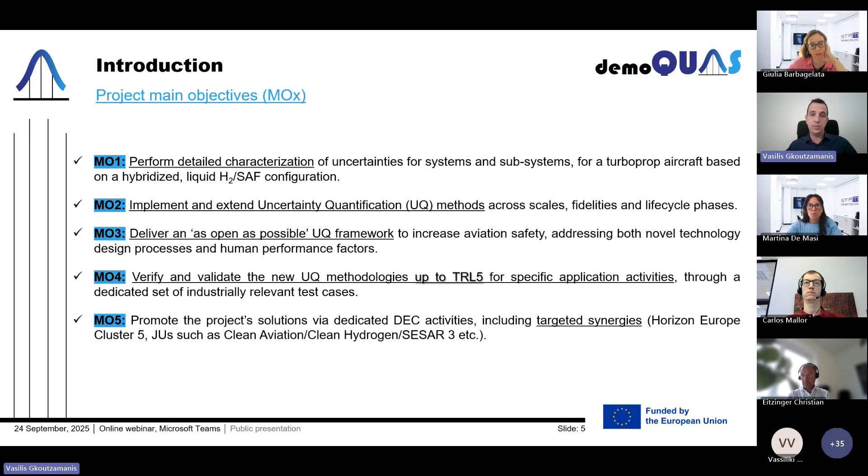Obviously, the fifth objective has to do with the synergies, and this webinar today is part of our main objective 5. Maybe these objectives do not say a lot so far to you, so I will try to delve a bit deeper into what we mean by each objective.

First of all, I would like to highlight how the project is linked with the main title of the webinar. This is, on one hand, the more sustainable aviation goals, so we are working on disruptive aviation technologies. The main scope of the project comes with hybridization and electrification, as well as the use of alternative fuels. This is why you see these words highlighted.

On the other hand, some of the test cases work on composite structures, and these comprise engine components as well as fuel tanks. So essentially, this creates the challenge: new components, new technologies, which bring forward design uncertainties, which put safety at risk when it's a new technology, and we need to delve deeper and provide evidence-based quantification of the safety factors and safety margins.

On the other hand, whenever we talk about new propulsion systems, for example distributed propulsion, when we have multiple propulsions on board, the components of the system can increase. This may raise issues with respect to failure cases on the systems level, and we need to be able to address those. So in a way, the safety factors which have been applied through all these years in aviation rely on old assumptions and may need further work to cover all new risks.

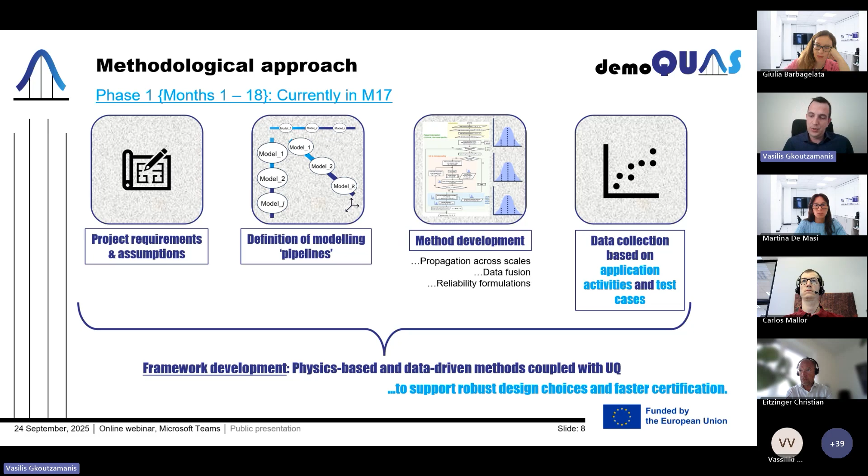And what we are currently focusing on is the development of the test cases. So manufacturing activities are also ongoing, and the main goal is to collect the different data coming from the different processes. I understand this slide may be a bit too dense to follow, but we make a classification between application activities and test cases. Application activities include all modeling approaches, whereas test cases include those particular cases where we will have actual testing data, manufacturing data, and even data from operations.

So we start from the system of systems. For example, this could be the aircraft system, moving on to systems from a technology's perspective, and this could be our engine, our propulsion system, and also the subsystems, which are the components from storage to burn: a tank where the fuel is stored, including the conditioning of the fuel, for example the heat exchangers, as well as the combustion of the fuel in the engine.

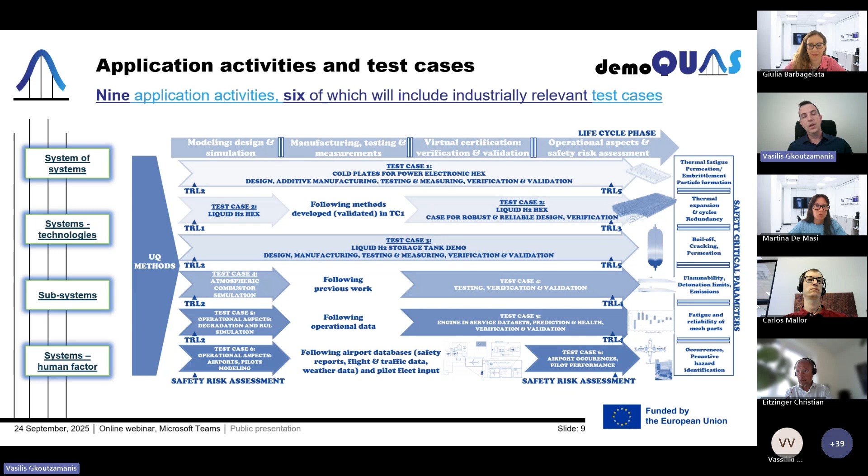But there is another perspective in this project. As you can see, bottom left side, the system's human factor. We assume that the human factor acts as a system, and we try to quantify the interdependencies that may have an impact on the pilot's performance during operations, and we want to see how we can couple that with an uncertainty quantification method.

Some examples of the test cases. These are not all the test cases, but I have chosen some indicatively to provide more words on each one. You can see here how our work is linked with the composite structure development. We want to couple the uncertainty quantification modeling with the CAM processes, computer-aided manufacturing processes, and the eventual manufacturing processes, such as rapid tow shearing from iCOMAT, or processes like filament winding from our partner in Greece, B&T Composites, and also be able to create a pipeline during manufacturing and measuring.

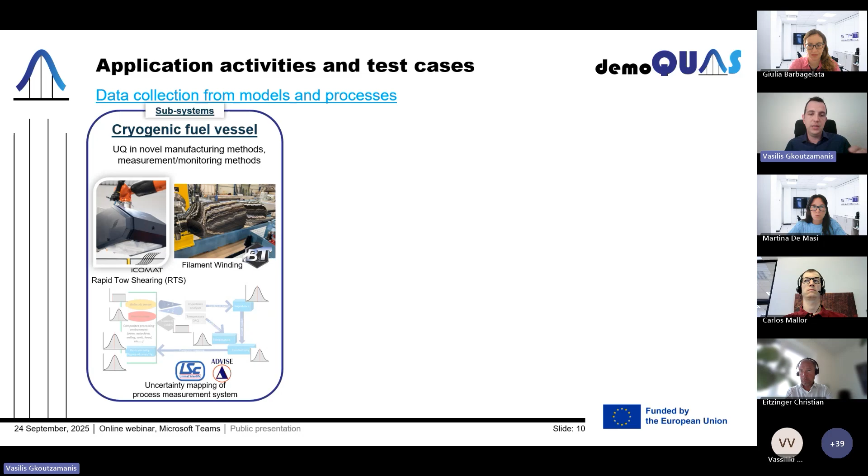A second subsystem comes with the cold plates, which are used for the power electronics. The perspective of this use case is to perform topological optimization, provide topologically optimized shapes, which proceed further to the manufacturing processes and testing activities. So this activity also contributes to the verification validation assessment, and this is directly involved with certification processes and digital certification principles that EASA also has. What you're seeing here is a cold plate example and a use case performed by Rolls-Royce on the cold plate for the heat exchanger of power electronics.

Moving on to the right-hand side of the slide, at systems level and technologies, we are working on engine performance quantification. The risk here, or rather the focus, is to be clear on how an engine degrades during its operation and various cycles of operation. We want to further reduce any uncertainties that characterize the remaining useful life of this component.

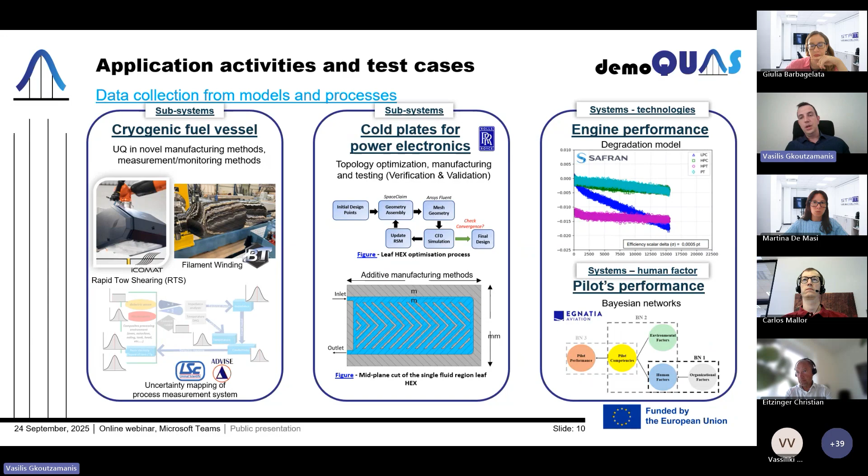Again at the systems level, but from a human factor perspective, we are developing a machine learning based model using Bayesian networks. We want to quantify the pilot's performance, seeing how different dependencies spanning from environmental factors, pilot competencies, human factors, and organizational factors of training may overall lead to the pilot's performance, and how these methods can improve this part.

I see that my time is almost there, so I will be very brief. Failure modes relate to the system's redundancy. We want to ensure the propulsion system operates even if a component malfunctions or stops operating, so throughout the whole mission we have redundancy in each of the systems and subsystems.

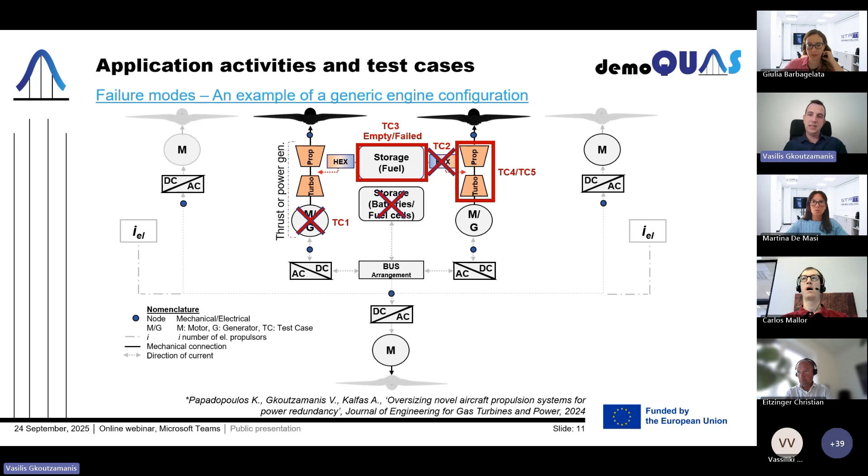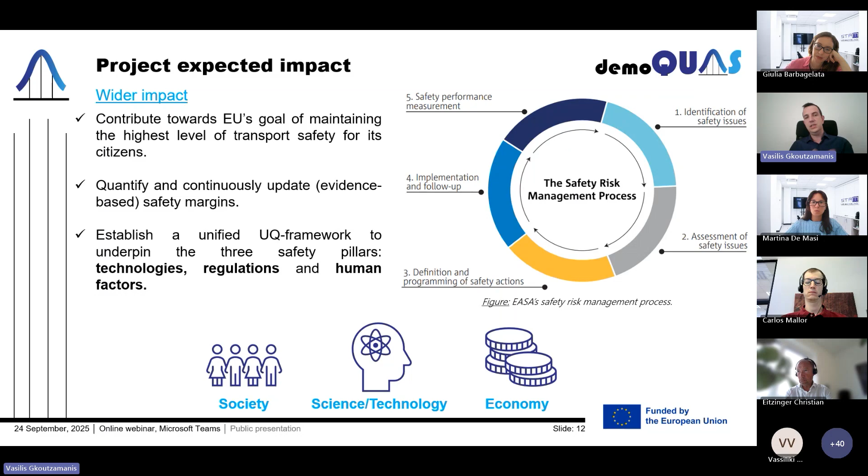As a closure, we expect that we will contribute towards the EU goal of maintaining the highest level of transport safety for EU citizens. We want to quantify and continuously update the safety margins and provide evidence-based characteristics. At the very end, we want to establish a unified uncertainty quantification framework for the three safety pillars: technologies, human factors, and regulations.

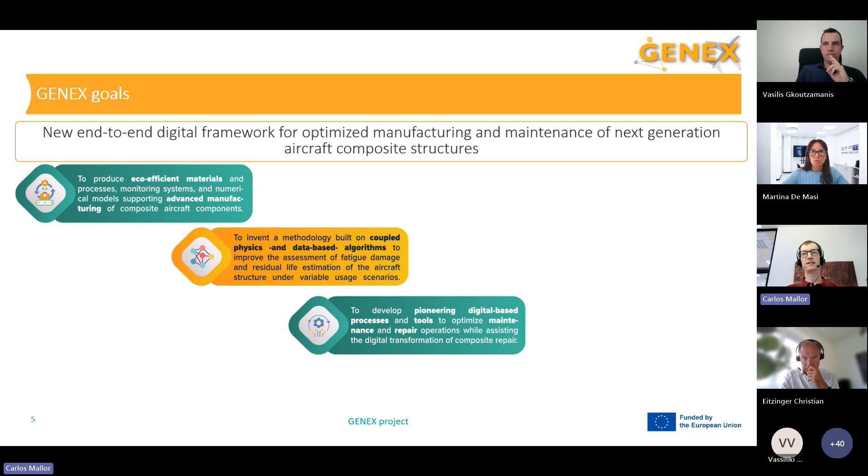The third specific objective and also pillar of our project is to introduce, in this nowadays manual repair process of this kind of parts, some digital methods and digital assistance in order to help the operator make the repair more accurately. These are the basic three pillars, and we have an additional one which is kind of transversal because it tries to interconnect everything together.

So we wanted to create a multidisciplinary platform, a digital twin platform, able to gather information throughout the whole life cycle of this product, covering manufacturing, usage, and also repair, so that we are able to create an ID of the part in order to have a log of the whole life cycle. And just as we saw in our last presentation, this is why we are here today.

So the GENEX project is here because we are advancing in digitalization, providing augmented reality tools for repair. We are talking about composite parts and composite technologies. We want to make them safer because we develop technologies able to control the health of the component. We are also talking about sustainability, using eco-friendly materials and more eco-friendly manufacturing processes, for aviation, using aircraft composite demo cases. So this is fairly clear why we are here together with DEMOQUAS and TOSCA, GENEX sharing our developments.

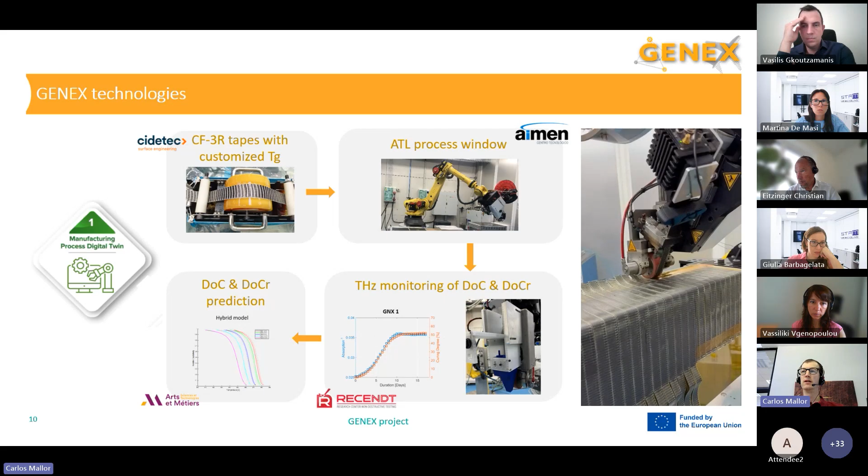In our project, nowadays we are actually manufacturing these demos, so we are in the demonstration stage of the project, in the very last one, and we will test these parts soon, according to the next developments, which are here.

So this is the second one: product usage, how our product, in this case the demo case spar, behaves over time when under real usage. At the very core of these technologies lie ultrasonic guided wave simulations, as you can see in this animation, and basically what we are doing is monitoring our structure.

We control a baseline where the component is pristine, and we are able to detect, thanks to piezoelectric sensors optimally arranged in this part, if some event happened—if we have an impact, or a delamination, or whatever. We developed this technology with tons of simulations and also a lot of actual mechanical tests, all monitored using these sensors that were embedded in our parts during the previous manufacturing process that I presented to you.

And then we have an arrangement of sensors, so we are able to receive the information from these sensors, and we collect it in a wireless sensor node, which is developed by CSEM.

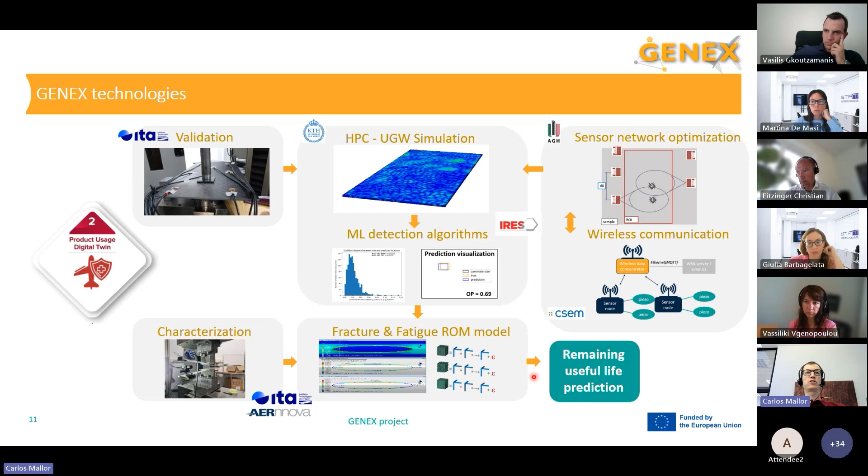Okay, so now the third one. Here we develop many tools regarding digitalization of maintenance, repair, and overhaul of these kinds of structures. The first one has to do with virtually assisting the scarfing process. The scarfing process, very briefly, is basically to remove some of these stacking layers of the composite where we have to perform a repair. We may have a delamination or an impact, and we need to remove this. This is done very manually nowadays, but thanks to the developments of DLR colleagues, we are able to use augmented reality to help the operator perform this operation more accurately.

Then the second one, we also thought it was interesting to work on cleaning. We may have dust or oil or other things that may interfere in the patch repair. For that, we developed a LIBS system, which is laser-based, where we are able to detect and also remove this dust or whatever we may have there.

Then this third part, which we developed in collaboration with GMI colleagues: we are using a system they have to apply a heat flux to blankets that are put on top of the patch repair in order to cure it once it is scarfed and ready for repair. We control temperature using a limited amount of thermocouples, but together we developed a reduced order model to estimate the full field of the heat transfer. So we are providing tools that help us control the process in a better way.

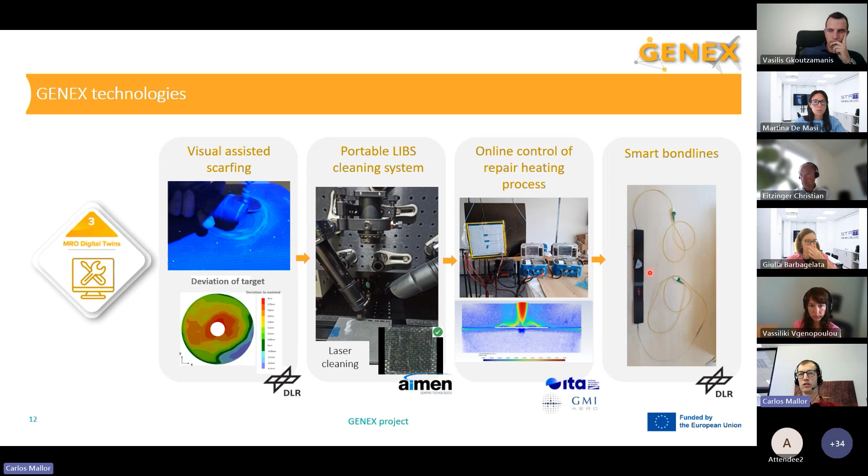And lastly, within this block we also develop some crack-stopping technologies that we can put at the interface between the patch and the actual component, to stop those cracks in the event they may occur again. So basically, those are the technologies in this third pillar.

And lastly, this is the transversal one: the platform that we are still finishing nowadays. This is the digital platform that needs to communicate with all of the other pillars. It takes information from the actual sensors during manufacturing, and it's also in charge of running the algorithms I described regarding structural health monitoring and fracture prediction, and also takes care of the digital twin of the repair that I just presented. So this is kind of the end goal we aimed for at the very beginning of the project.

Okay, so just to quickly recap, I want to talk about how GENEX technologies are transferred to industry. We had some industrial partners: Aernnova, manufacturers, Ziegler, and GMI experts in repair, and as you can see they are benefiting from these advancements. We also got some really important people on the advisory board from Lufthansa Technical Training in Germany and also from Tarmac Aerosave here in Spain. They really helped us throughout our project to stay focused, close to industry, and aligned to the real needs, so we consider this a really important part.

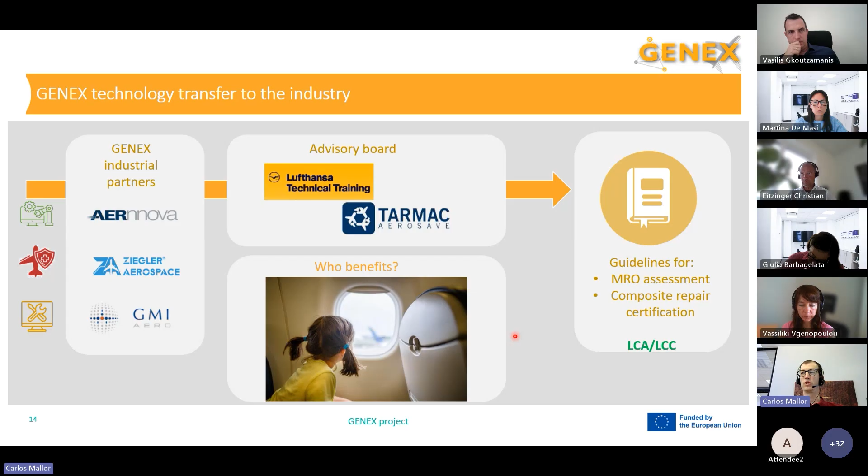And just to conclude, I want to highlight again that we were developing this whole project always thinking about society in general as the main beneficiary, as we are more concerned these days about eco-efficient materials and processes. So I just wanted to close with this point.

Okay, so I think this is all from my side. Sorry for the interruption, I had some connection problems. These are my details, and this is our webpage, so please feel free to contact me if you want to talk about some of the technologies involved here, or if you have any other questions.

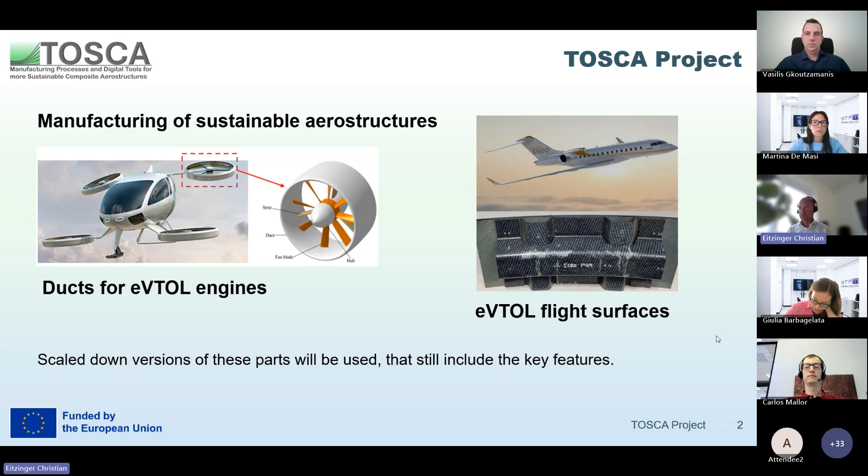The background for the project is about parts that may be relevant in future aerospace, especially electrical vertical takeoff and landing applications. The parts we are looking at will be scaled down versions of these future parts, but they will have the main features expected in these future aerostructures. As a particular focus of the project, we are dealing with sustainability, which gives the connection to the webinar we are now having.

In our project, sustainability is not only a materials topic. Clearly materials are important, but if you substantially change the materials you are using, this will have significant impact on the processes, not only during manufacturing but along the whole life cycle. In the project, we're also looking at how digitalization can improve the processes and optimize the reuse of parts at the end of their life.

In order to do that, we are dealing with three different topics. The first is on the material side. Epoxy vitrimer resins have already been developed. They combine the advantages of currently used thermoset resins in terms of mechanical strength and durability, and on the other hand, the advantages of thermoplastic materials that are easier to recycle. We want to make use of both of these advantages and develop processes using these vitrimer resins so that they are really suitable for the manufacturing of future aerostructures.

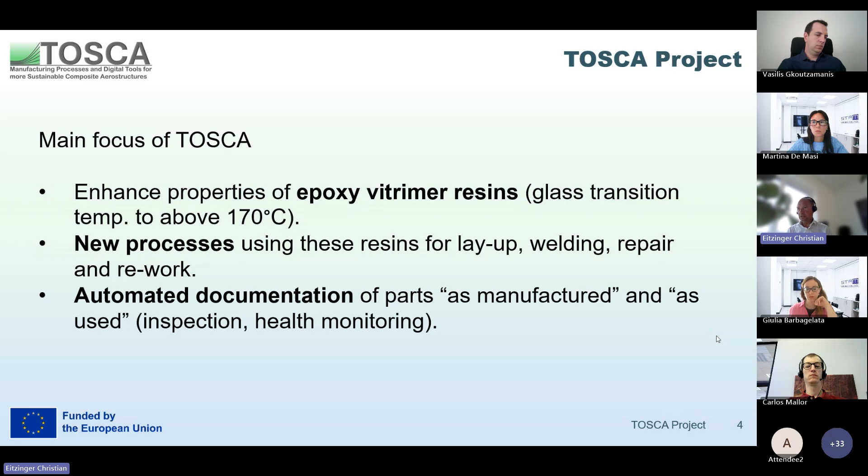The processes we are looking at include the main manufacturing processes such as layup and welding, but also processes that might be relevant in the future during the life cycle of the parts, especially repair processes. Along this whole life cycle, the automated documentation of the parts as they are manufactured and used is the main part for digitalization that we are looking at.

Just a brief overview of the production process. The standard manufacturing process ends basically here where the parts are finished. We are following a somewhat standard approach, starting with layup, where you create the stack of material. We are using pre-preg material in our project. We will look at ways to integrate structural health monitoring during the layup. There will be some curing stage, and an additional welding stage to join the cured parts.

This is different from current thermoset resins because they are obviously not suitable for welding, but the new vitrimer resins enable us to do that. Once the part enters into its life, we perform structural health monitoring to acquire information about what's happening inside the part, and we are also looking into repair processes - on one hand making these processes suitable for the new type of material, but also how we can acquire digital information about the repair processes, which is a bit tricky because very often these processes are manual.

And the backbone for all of this is a digital model of the part. We may call it a digital twin that is collecting information about what has happened to the part during its lifetime, and we can use this model at some stages of the life cycle of the part.

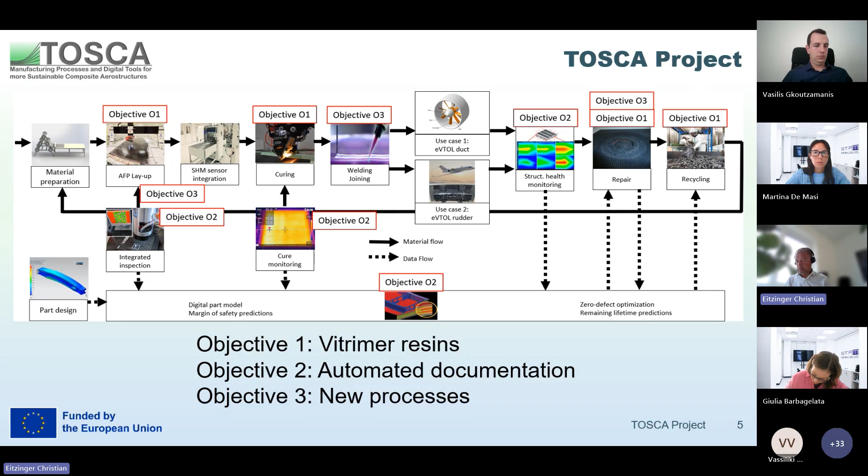Just a quick overview on the main technical achievements. It might be relevant to know that the project has just started. We started working in January 2025, so we are now in month 9 of this 3-year project, which is still in an early stage.

Regarding the vitrimer resin, or the new type of resin we want to use for the prepreg material, the main focus is to increase the durability. As you might know, standard prepreg material needs to be stored frozen in a refrigerator at something like -18 degrees, and once taken out it has to be used within a period of, let's say, 24 hours. What we would like to achieve is that we don't need to store the material in a refrigerator, and that its durability is much longer than is currently the case for thermoset resins.

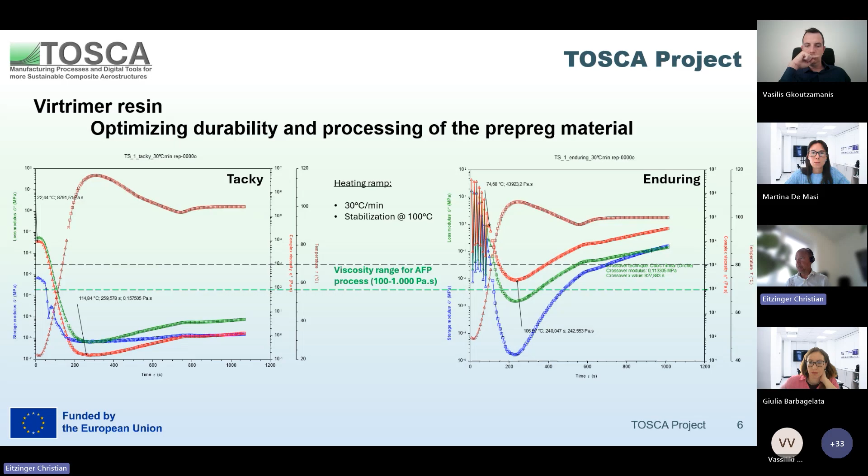One key aspect is that we still need to be able to process the material properly, which requires a certain level of stickiness or tackiness. We need to make sure that the viscosity of the material is in the range so that it's usable for automated fiber placement, which is the main layup process we are using in the project.

The second aspect is automated documentation, and we are acquiring two different types of information in our digital twin. The first is similar to what we just saw: collecting information from structural health monitoring systems and creating estimates on how, for example, cracks will propagate and how this affects the remaining lifetime of the part. This happens when the parts are in service.

The second type of information we are collecting is quality control information. For example, in an automated fiber placement process, you might find defects such as gaps, overlaps, twisted tows, fuzzballs, foreign objects—a whole range of different types. We want to investigate how these defects impact the remaining margin of safety.

This helps decide whether the defect needs to be removed or whether it can stay inside the part. The idea is to do this through simplified finite element calculations that provide a targeted prediction of what the effect of a particular defect will be.

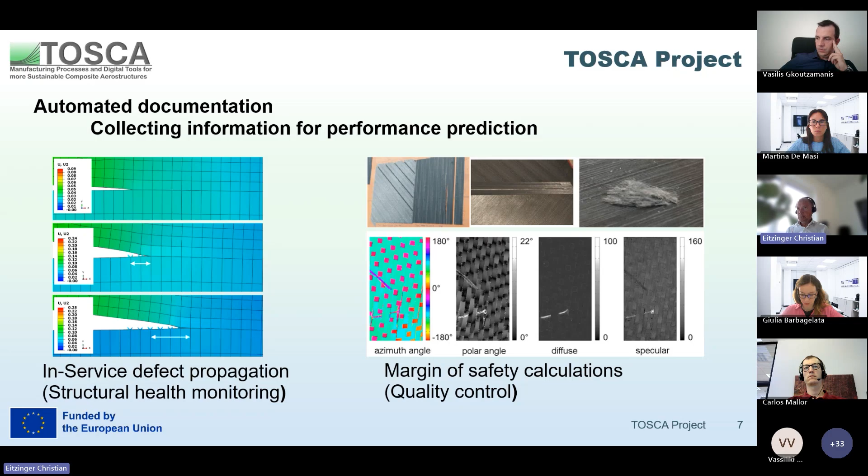Finally, regarding the processes, we've started working on the layup process by designing a specific layup head. The mechanical structure is somewhat standard, but certain process parameters need to be taken into account because the type of resin is new. We're also looking into integrating sensors for automated inspection, which may happen while the layup is taking place, substantially improving the productivity of the process.

We are also investigating welding as a process. One challenge is the heating systems that are needed, which we will try to solve through carbon fiber filaments or carbon nanotube filaments.

Finally, we are also investigating the repair of such composites using digital twins and acquiring information about what has actually happened on the part during the repair. The technology provided by GMA Aero, our partner for the repair topic, also allows the creation of some kind of physical twin.

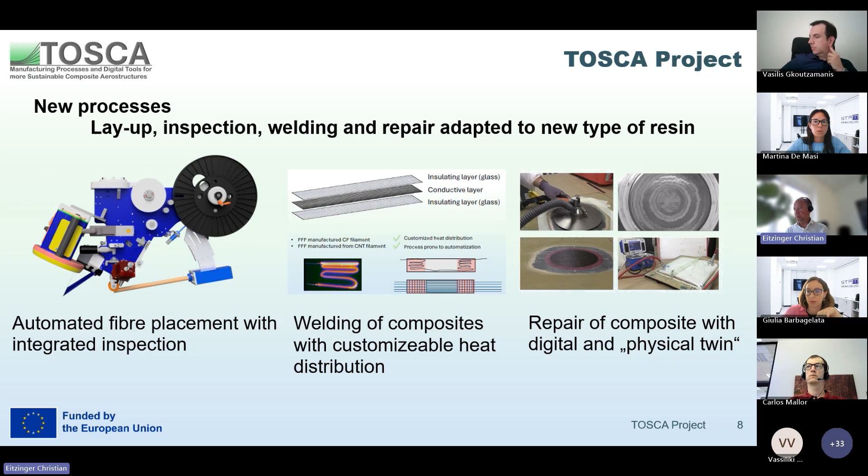What do we expect to get out of the material once it's finished in roughly 2.5 years? On one hand, we would like to have high quality manufacturing processes for this new type of material—a prepreg material with Vitrimer resin. The technologies we're developing should be applicable for future aerostructures, covering the main features we expect.

In terms of long-term impact, one key target is to increase the recycling rate, which is currently, depending on the source, around 15%. We would like to achieve that at least 50% of the parts have the possibility of being recycled in the ways we are investigating in the project.

We would like to increase production efficiency. This is mainly happening at the layup stage, where we have integrated inspection, which removes all the time needed for visual inspection.

We would like to simplify the repair of composite aerostructures. Currently, for thermoset resin, including the scarfing we've just seen in the earlier presentation, that takes about 53 hours for a typical repair, and we would like to reduce that to about 20 hours through the simplified behavior of the Vitrimer resin. Finally, we would like to reduce the need for manual documentation along the whole life cycle of the part.

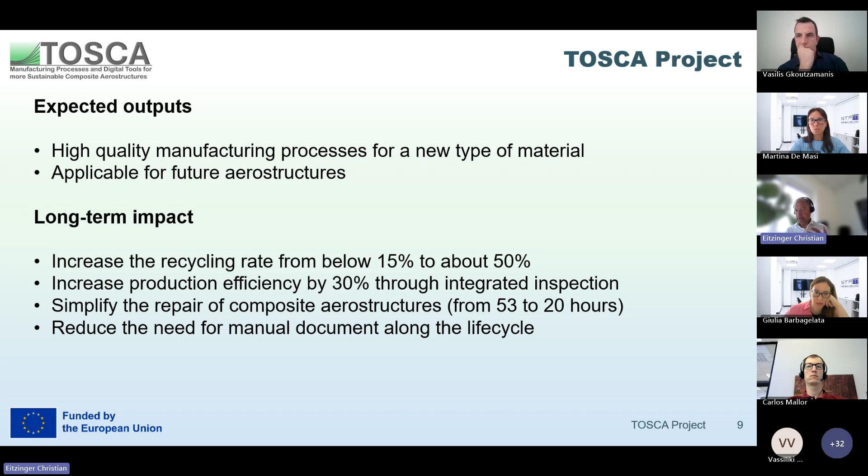So these are the long-term impacts we hope to get out of the TOSCA project.

Currently, as said, we are just 9 months into the project. We've so far manufactured 2 batches of this new type of prepreg material, tested it, and the second batch now shows good results on the different processes: layup, welding, and repair. The layup head has been designed, built, and is currently being installed at FIDAMC, who are doing the layup. The inspection sensor to be integrated on the layup head is currently under construction and will be finished by the end of this year.

We have also agreed on a data format for the digital twin, based on a standard format proposed by Dassault Systems in their CATIA environment. We thought this might be a good basis with a chance of being more widely used in the aerospace industry. We've set up an initial example of that data structure and are now proceeding to use this for the test parts.